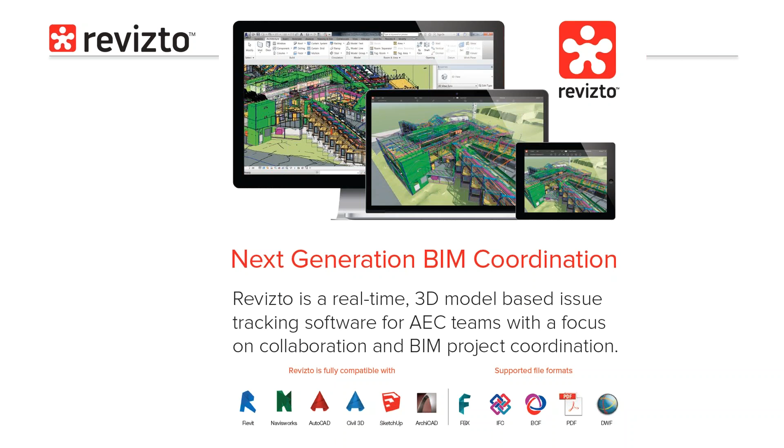So the problem today - the first conversation I have with a potential user of Revizto is just to talk a little bit about their current process, to identify what the challenges are and discuss the problems. What does the traditional coordination cycle look like for you? What I hear a lot is that this process can be very complicated, which is confusing because you have different consultants who use different technology, have different preferences, and want to store their data in different places, in different file formats. So this multidisciplinary communication can become confusing and cause delay and increase project costs.

So if you're involved in a project, how do you create an issue? How do you assign an issue to somebody? How do you notify them that you've updated the issue assigned to you? Do you wait until the next design review meeting? Do you send them an email with a screenshot, or print out a PDF and send that across and wait for them to respond? Do you have to upload the latest version of the federated Navisworks model and then wait for the other consultant to do what they need to do? How do you comment, communicate, and track all of this? It can be very difficult because people are doing different things, trying to achieve the same goal using different processes and different technology, and it can just become confusing.

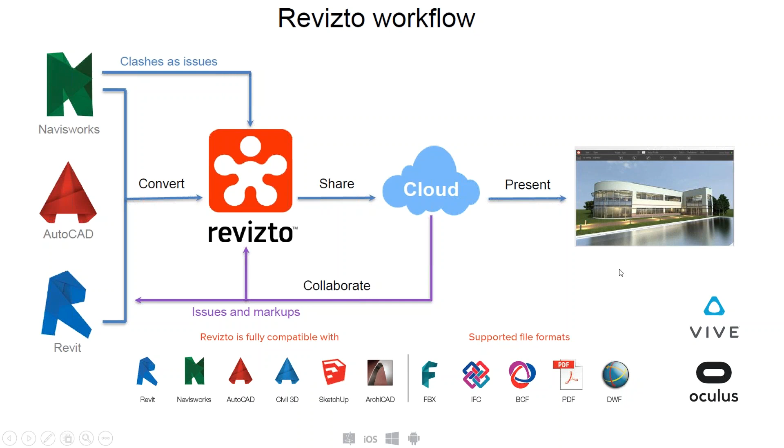...you can also view your model and clashes in virtual reality. So we directly support the Vive and Oculus Rift, and there are other virtual reality domes that we integrate with as well, like the Igloo, for example.

Let's get back to the software itself. So I'm just going to change my screen here and open up a Revit model. So once you've installed Revizto and the plugins, you will have the toolbar here, Revizto 4, available in Revit, for example.

So I'm not technical in Revit or Navisworks. So the first thing I want to do is export my project to Revizto. So under the tab here, we've got a number of options. One of those is export. So I select that. I'm then presented with a list of things that I can export.

And this will include rooms, sheets, levels. I can take the materials through if they've been applied, phases, grids. I can also take through all of the sheets as well and select what format I want those in, either as a vector or as an image. And this will also take through any linked files.

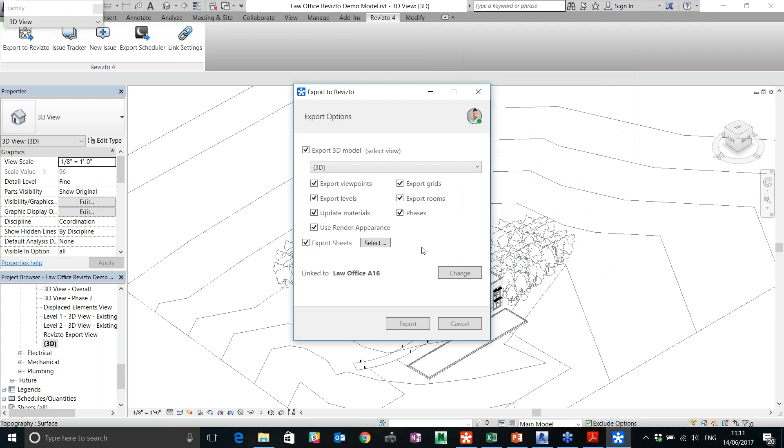So I hit export. I've done this one already, and in the interest of time, we will wait and watch. Once I've done that one-click export, I can then open up the project in Revizto, anywhere on any device that I have the software installed. So I could open up this model now on an iPad, for example, or in virtual reality, and so on.

The first thing I'm going to do, which I think is important to mention right away, is change my preferences and the navigation. So I can go in here and fine-tune a few things. For me, I'm going to use the gaming navigation mode, which is easy, if you like. You can also stick with Revit if that's what you're used to, or Navisworks, depending on what that user is familiar with. For me, I'm going to use game and go back to the 3D view.

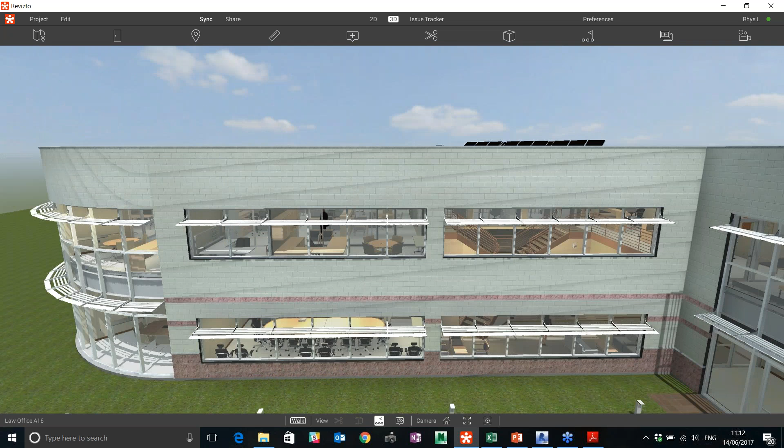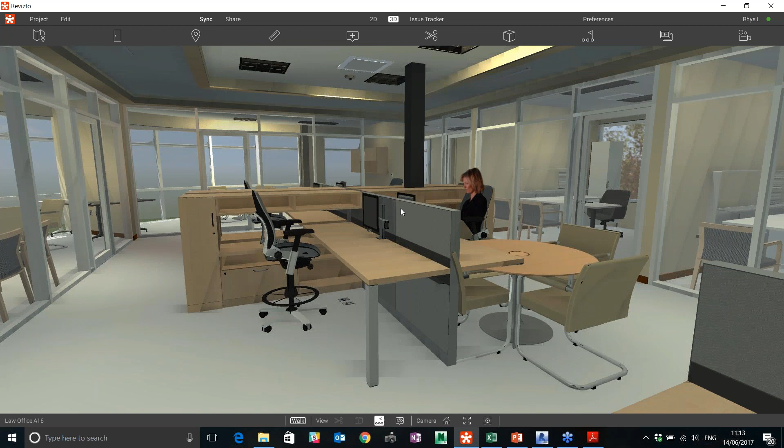So to navigate around this model now, literally with a few keys on my keyboard, I can start moving and exploring this particular project. So with my mouse and a few keys, I can dive straight into the building with ease. Coming back to that point of not being a technical user, a lot of what I hear from the people I speak to is typically on a project, if there's 50 people, a low percentage of that team are Revit, ArchiCAD or Navisworks experts. So it's reliant on one of those people being available to navigate them through the model. With Revizto, it engages all of the project team because the software is so intuitive and easy to use.

So I'm in fly mode at the moment. I can switch to walk mode at the bottom here, and then that locks me to that particular floor. I've got a number of tools here that I can start using.

So let's just take a measurement here. I can select our ruler key and go through and just start taking measurements very easily. Maybe I want to know the distance between the floor and the ceiling, for example. So there we go, it's 2.740 meters.

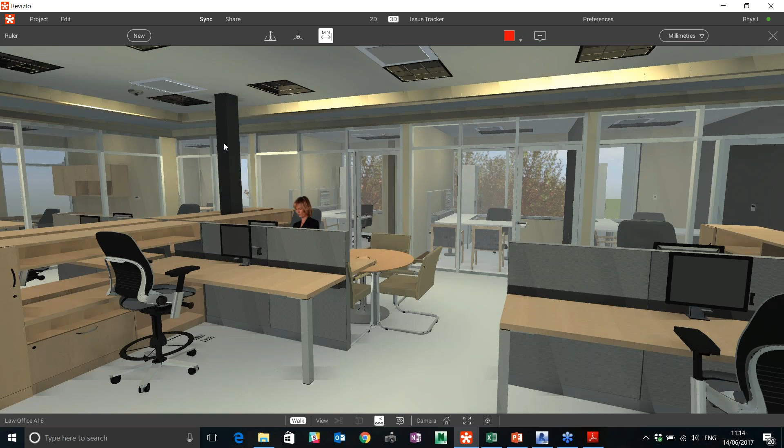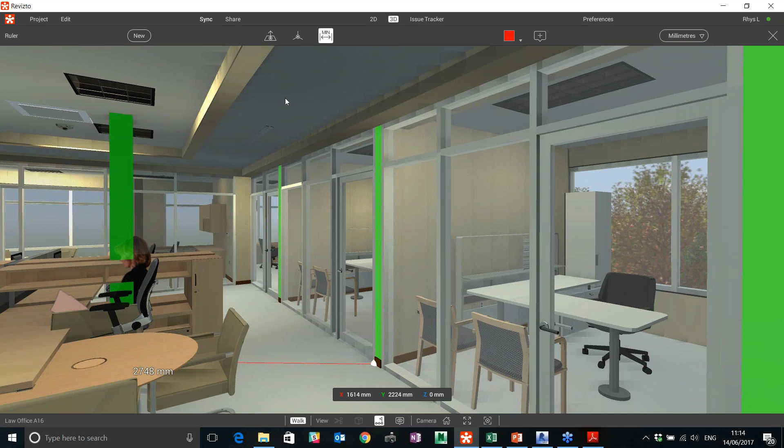I can take minimum distances. So if I select that column and that panel, for example, that will show me the minimum distance between those two, and that's displayed there. I can get a bit more specific if I really want to and move these ends to any surface and get that distance. So that's the 3D data come through as I'd expected.

Now the big difference about Revizto compared to some other visualization tools is this just isn't a visual model, this is information visualization. So if I double click on a property, all of that metadata has come through from the Revit model as well, so I can actually go in and view all of the data behind that particular property, which is obviously really, really useful and information that we need during the project.

And maybe the Revizto project is one of the end deliverables to your client then to use to operate that facility. So let's go back home.

Actually, just check that all the 2D information has come through as well because I exported all of those sheets. So all of my sheets have been listed here. I can see those listed one by one. And if I double click on a floor plan, for example, that then opens up the floor plan.

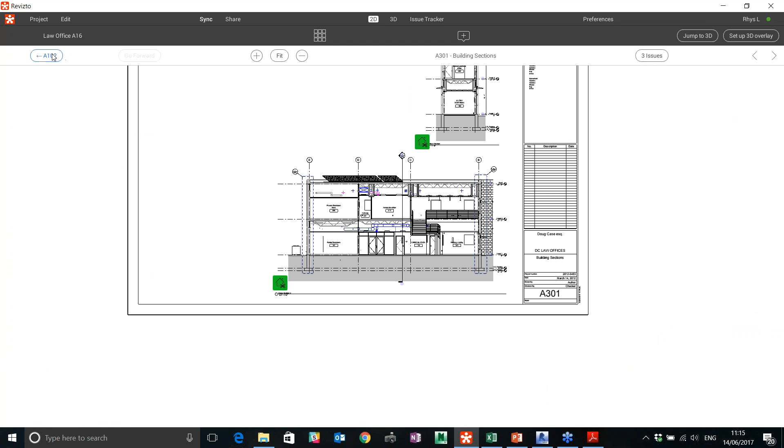So I can go in here and navigate around as I'd expect. It's also allowing me to jump to any linked sheets and go back. I can also jump to the 3D view from here just by double-clicking anywhere on that 2D sheet, and that will take me back to that exact spot in the 3D model.

And on this sheet itself, if I select the 7 issues at the top of the screen, that's now identifying and showing me where there are live issues on that sheet, color coding them based on their status. I'll come on to this shortly. I'll just hide them for now.

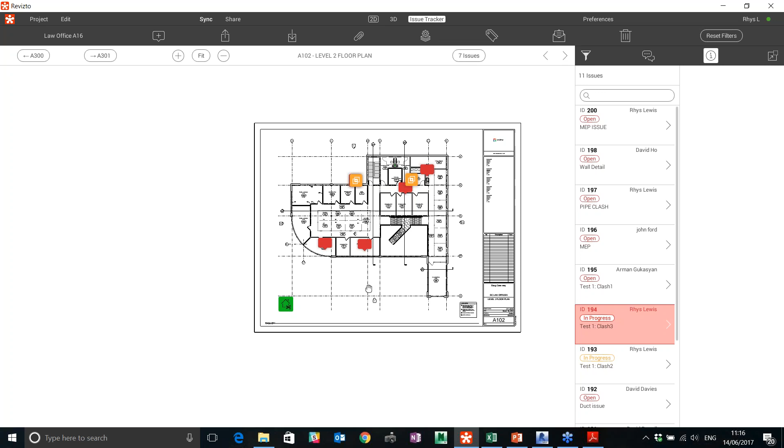Something else I can do, which is really powerful, is overlay the 2D sheet in the 3D model. If I select this green icon, watch the screen because it happens quickly, that's now overlaid the 2D sheet in the 3D model, which is so powerful for a range of reasons.

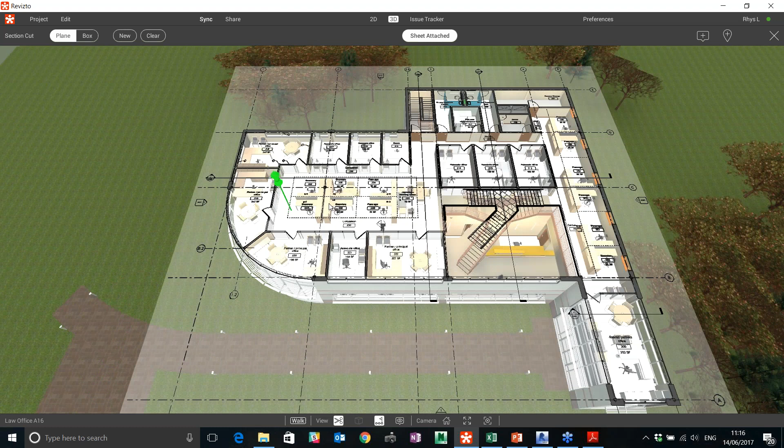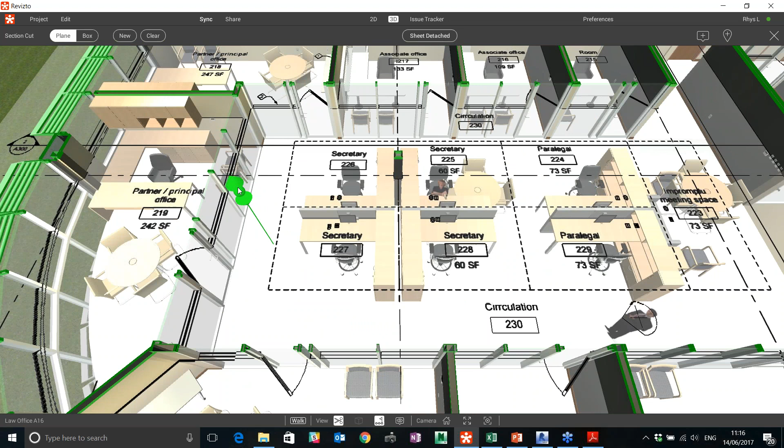If we just zoom in here and stick the sheet in place. The sheet knows where it lives because it's come in directly from Revit, and I can start dragging the 3D model through the 2D sheet. This allows me to perform an additional check between the 3D model and the 2D sheets, and also maybe explain to a non-technical person that the 3D geometry has derived from the 2D information, and lots of other useful features as well.

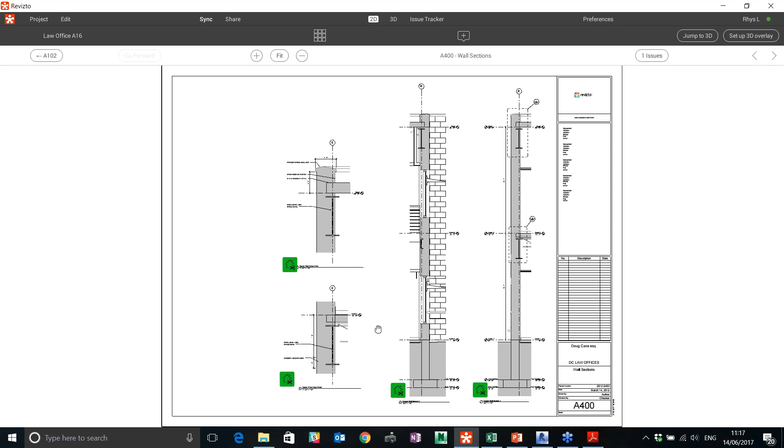I'll show you one example. If I select all my sheets and type in, let's look at one of the wall sections and open that up. These dynamic overlays have been set up automatically for me, so there's no additional work needed. If I select this green icon again, it does the same thing, but this time it's allowing me to check this particular wall detail. I can go through here and do the same thing, which is great.

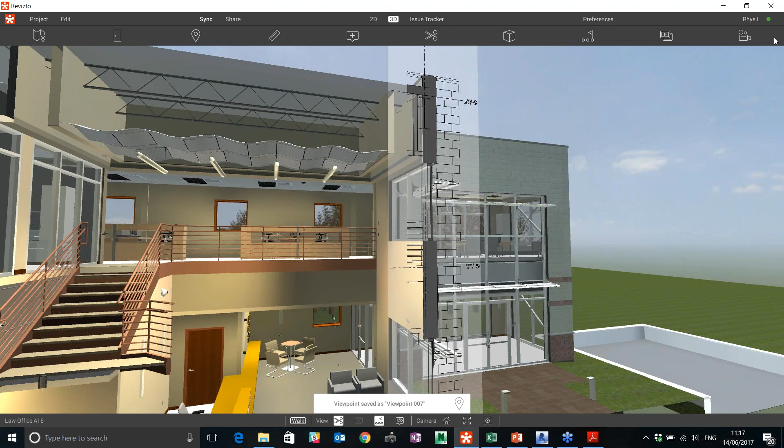So I may want to create a new issue from that, or I can create a viewpoint, and that will now be saved as my viewpoint, which I'll show you next. Let's go home, back to my home viewpoint.

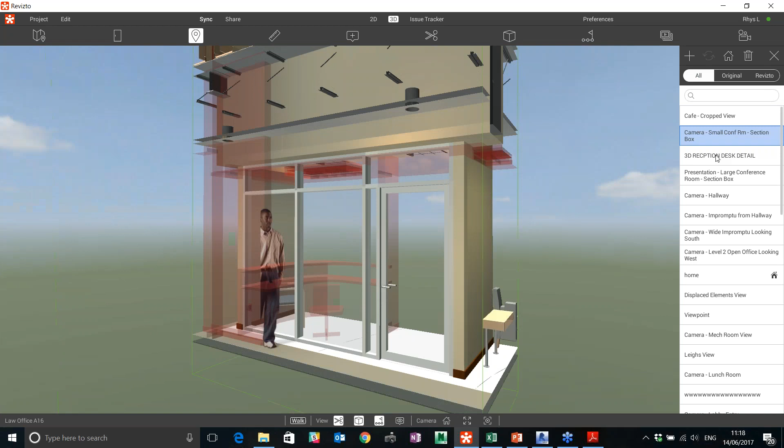I'm just going to run through some of the things that have come through from Revit. We mentioned viewpoints, so if I select viewpoint, I can see they're all listed here on the right-hand side. I can move through these one by one—a great way to navigate through this particular building.

On the right-hand side, there are the viewpoints I've created directly within Revizto. There's the viewpoint we just created, and if I go a little further up, there's a viewpoint where I've actually color-coded object categories in the scene, which I'll come back to shortly, and so on.

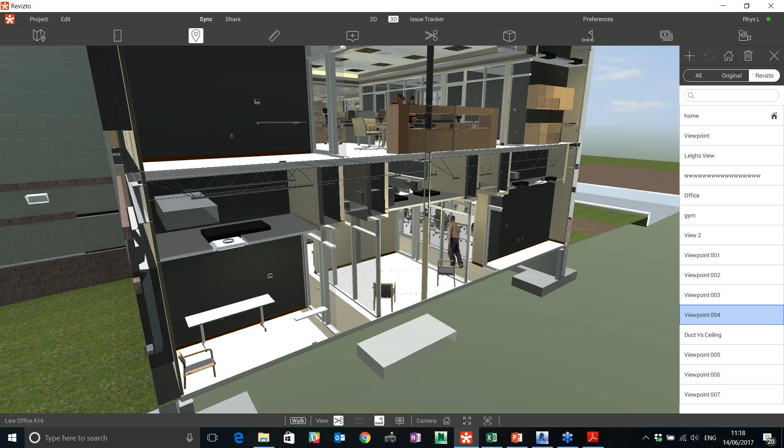Another really nice tool for navigating is that all of the room data has come through from Revit as well. If I select room here, all of the rooms are listed on the right-hand side, and I can browse through those one by one, just select the relevant room. That takes me to the center point of that room. If I know the room name, I can type it in, double click, and that takes me to the center of that room to look around.

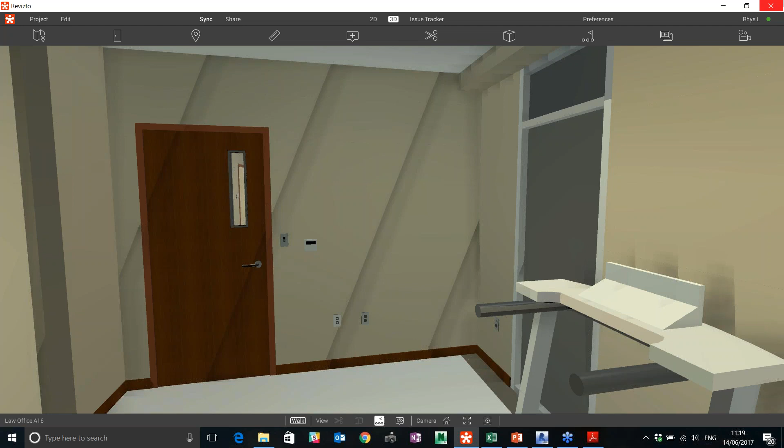Now, if you're using Navisworks just to navigate around the model, that's difficult to do anyway. What I hear a lot of users telling me is that they find themselves getting lost in a project if it hasn't been set up efficiently or correctly, especially in larger scale projects. With Revizto, it's actually quite difficult to get lost, but if you do, very quickly you can find out where you are. If I select our map icon, that's going to show me exactly where I am in the project. This is only a small example, but it gets the point across.

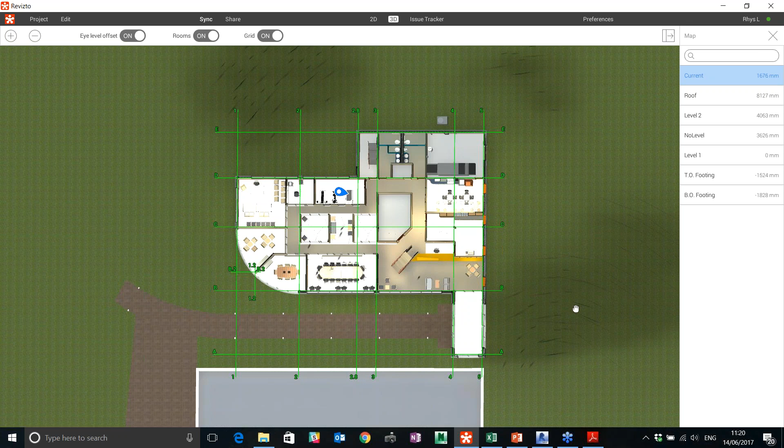That drop pin in the center is where I am. I can see the level I'm on, the rooms, data and grids have come through as well, so I can see all of that. Perhaps we're in a client presentation and want to move to floor 38 in a residential tower, for example. On the right-hand side, I double-click on the level I want to move to. Back into the plan view, then double-click on the drop pin, and I'm now back in the 3D model. Very, very simple to do.

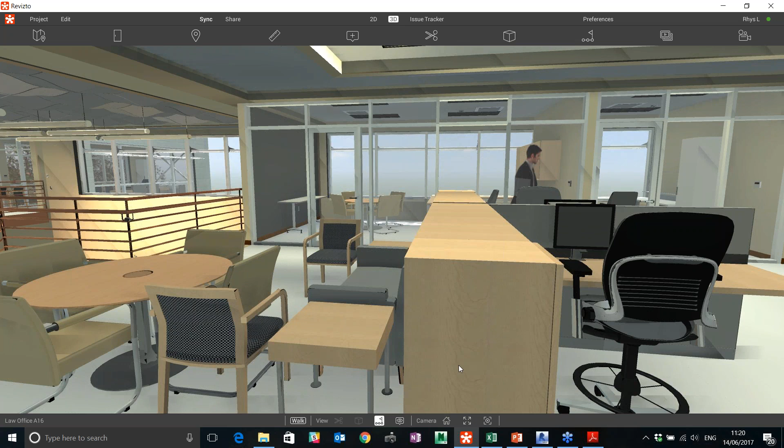So navigating around the Revizto project doesn't require much technical experience or training at all. You don't have to be a Revit or a Navis or a Civil 3D expert to go in and explore this model.

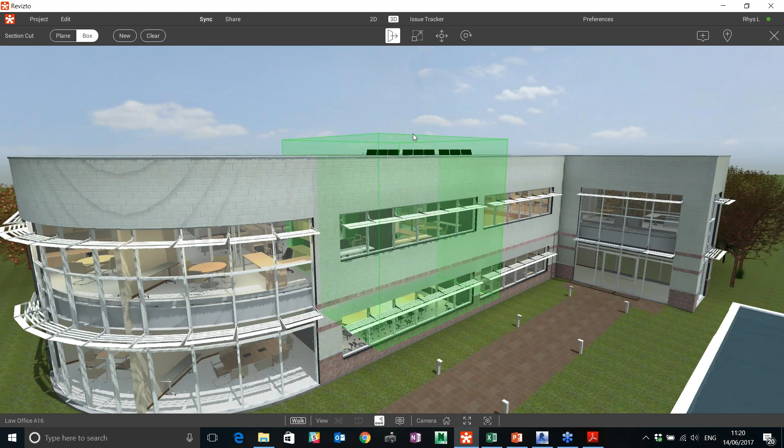One or two final things I'd like to show you here is I can start cutting sections through this building. I can apply that maybe to this wall and very quickly go in here and start chopping up that model. All of this I can do on a tablet, so that's a plane. I can create a section box and do a couple of things here as well—make this bigger, smaller, just move the position of that.

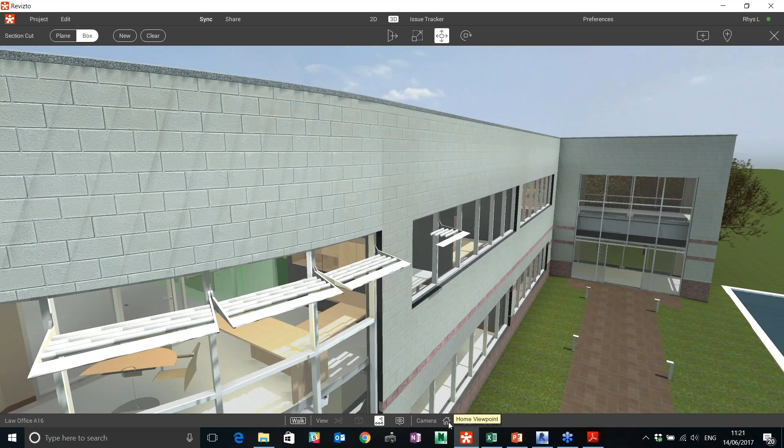So very, very simple to do, which is important if you want to engage the whole of your project team.

We can go in and also color code and isolate link files, objects, and phases. So within here, I've got everything showing. If I hide everything in the scene for now, maybe I only want to look at the mechanical equipment.

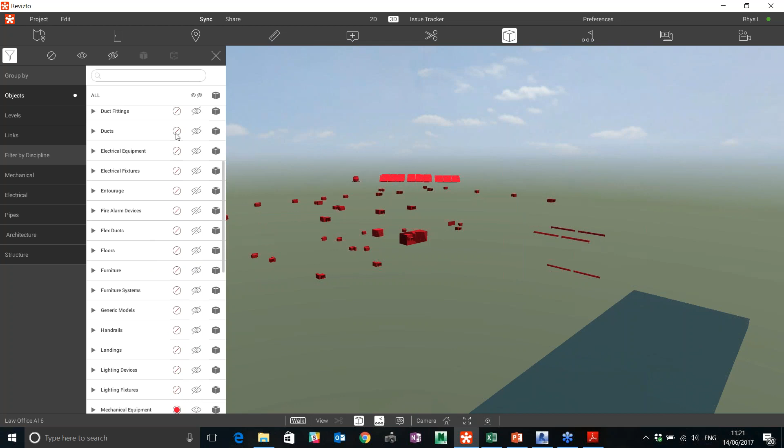So we'll bring that in, and I can actually color code this. I can go in here and choose the color that I want that particular object or category family to be displayed as. I can actually go right into individual objects as well if I want to. Maybe we want to look at some of the ducts in here as well, so let's make those blue and make those visible. And some of the duct fittings, we'll do the same thing where we color code those. And I can take the same hex color as well if that's what I want to.

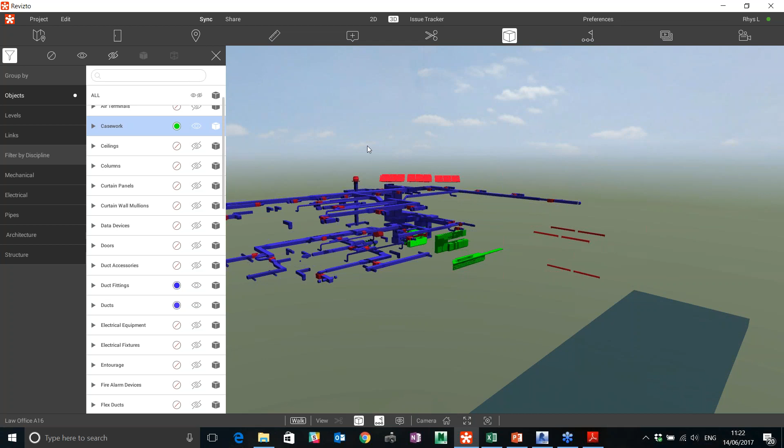And we'll put one more in there. Maybe we want to look at some of the casework, and we'll make that a separate color, and bring that into the view as well. So a great way to visualize your model and go in and perform additional checks.

So we've been asked for this for quite a while by some of our key clients. So I think the important thing to mention is our development roadmap is heavily driven by our customer demand. So the product is doing what our customers are asking.

Maybe this is something I want to share with somebody, so I can create a new issue, or just save that as a new viewpoint. Click on the plus icon, and that's now been saved, and I can call this whatever I want, and that's now saved. So whenever anybody else comes into the project, they'll see that in the viewpoints.

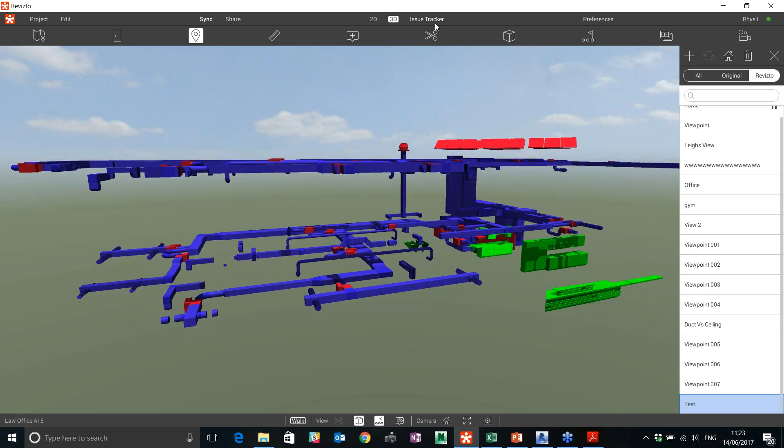So what I've done so far is exported my Revit model into Revizto.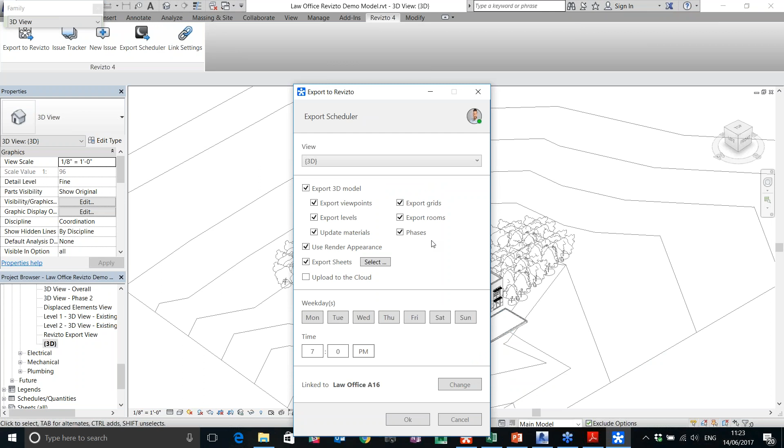What we can do as well is that process gets done automatically. So if I go back to Revit, I have an export scheduler where I set up the schedule to run maybe at 7 o'clock every evening, so the latest version of that model is uploaded to Revizto. And I can select what it is I want to export back to Revizto. And under project, I can see it keeps a copy of all of the revisions as well.

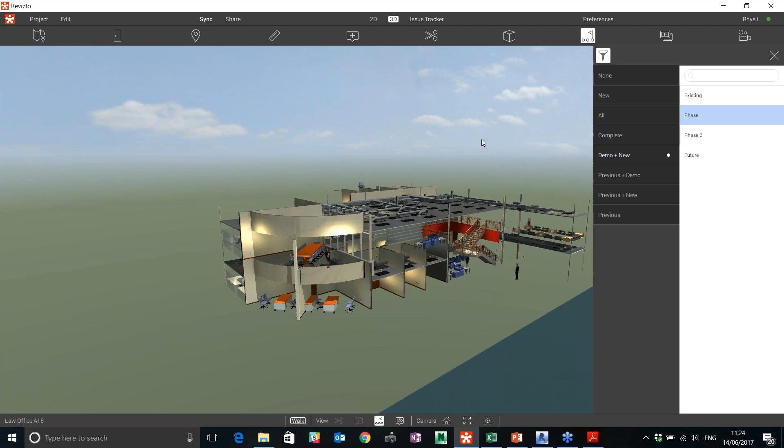Because this model has come in directly from Revit, I can go in and look at phases as well. If you set these up in Revit, then I can go through these one by one and use that filter to look at different phases that have been created, and go in here and mark that up, which I'll show you next. So a really, really powerful navigation tool, but the real powerful part of Revizto, in my opinion, is the issue tracker, which we're going to look at next.

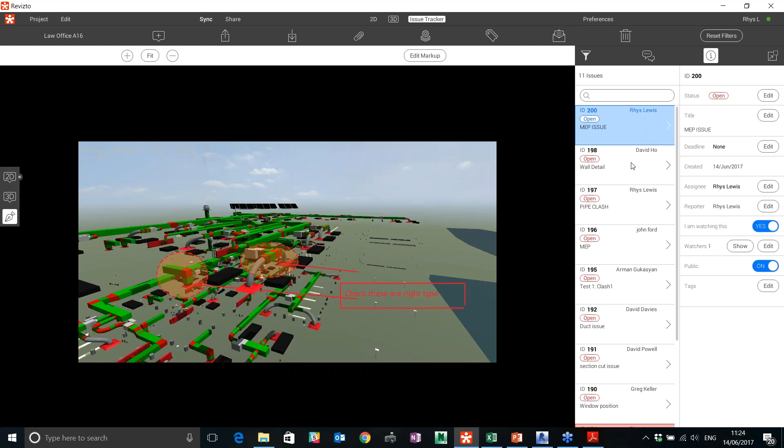So let's talk about BIM Collaboration. With Revizto, you have the ability to manage and track all of your design and coordination issues in one environment. So if I select the issue tracker, you'll notice down the right-hand side here, there are issues that have been created previously. So we'll come back to these in a second. And these issues have been created in a number of different places.

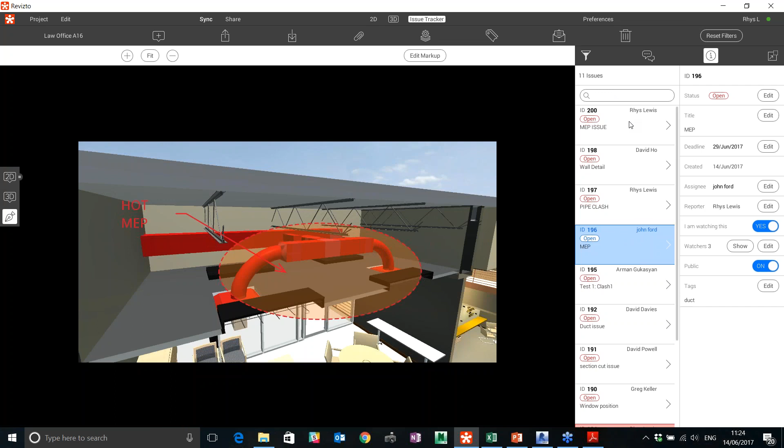So if you've got Revizto installed on the plugins, it doesn't matter where you create an issue, whether that's in Revit, in Navisworks, in Civil 3D, or in Revizto itself. They're stored in what I like to refer to as your single source of truth.

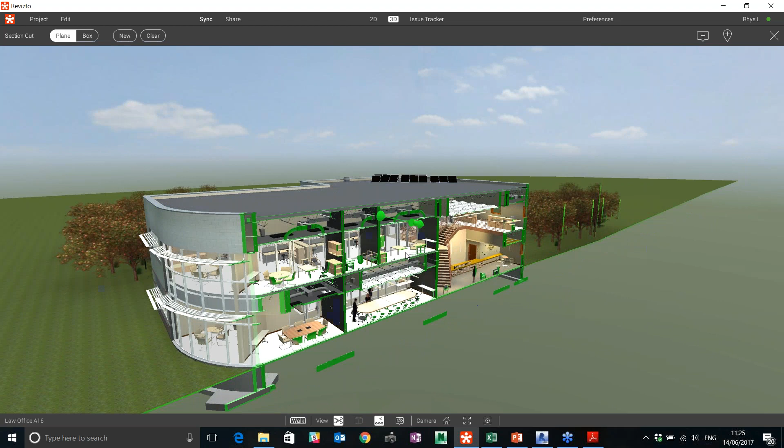So let's go back to our home view and create an issue. We'll do that first of all in 3D in Revizto. Let's maybe take a section through the building here and go in and explore. We can do a couple of things here. Let's take, first of all, a measurement between the two walls to see if they comply with whatever regulations we have for this building.

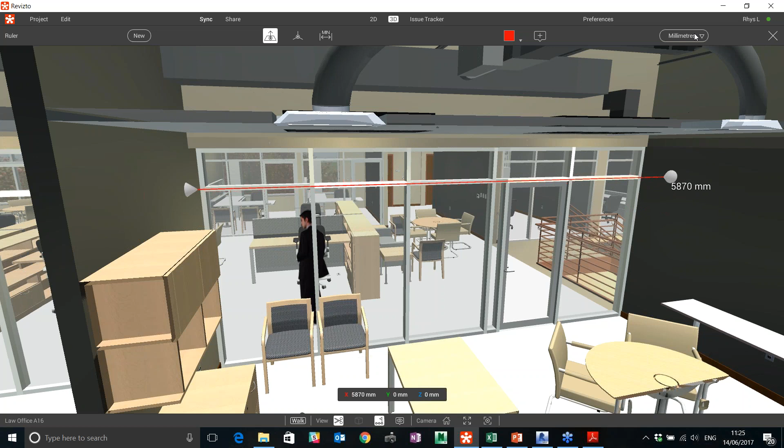So that's not quite wide enough. So I want to make a note of that and create an issue. And I can change the measurement there. So I've clicked on the plus button there, which is to create a new issue.

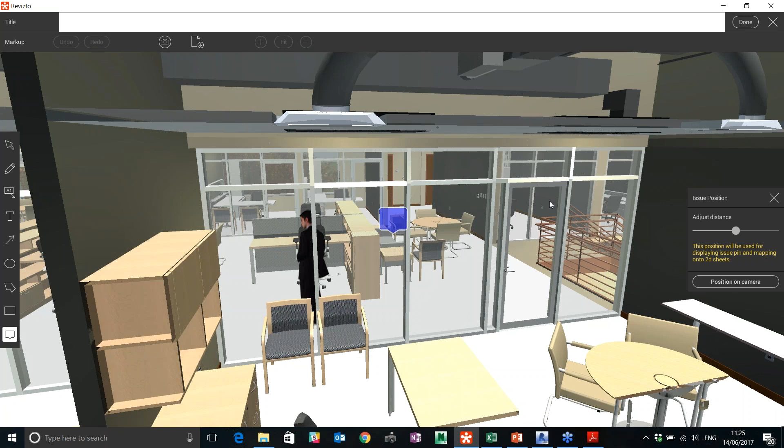So we talked about this earlier on, and how do you do this currently. I'm not going to create a viewpoint if I'm in Navisworks. I'm not going to punch out a PDF if I'm in Revit and then redline that up and send that to somebody in an email and wait for them to respond. What I'm going to do now is actually mark up the model. So on the left-hand side here, I have my markup tool. Let's start annotating the model.

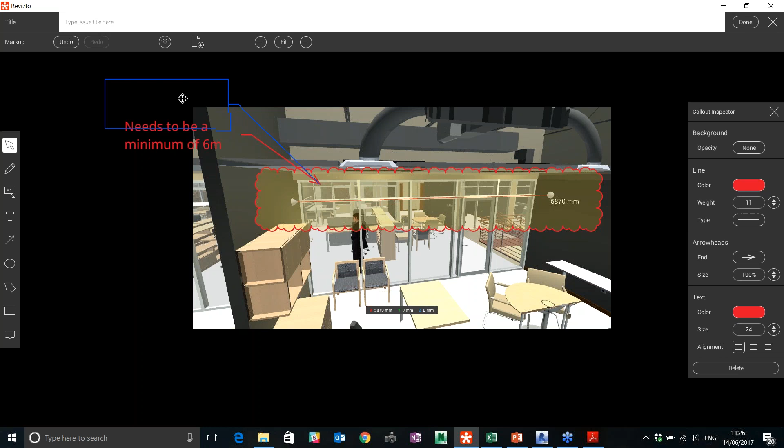So I can change the colors, the type, the size of the text and the arrows and all of that good stuff. But I'll leave you to do that yourselves when you install the trial version of Revizto. We'll just add some text there to say it needs to be a minimum of 6 meters, for example. We'll put that there, and we can change the size very, very easily. And that is now my markup, if you like.

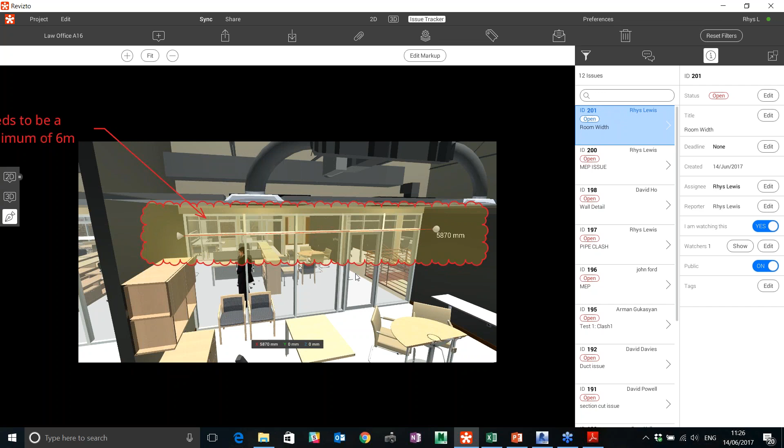I'm going to give it a name at the top here, so we'll call it room width, and I'm finished there, so I'm going to click done. Now what that's done is store that issue in the issue tracker, so it's given it its own ID, 201. This issue is now intelligent, so it knows where it lives in the project.

So if I click on 3D, that takes me right back to the 3D view of the model, and now I can see there are other issues displayed because I have the issues visibility switched on. If I click on 2D, that will show me all of the 2D sheets that issue touches. This particular issue on this sheet is the blue one, and there are others on there as well.

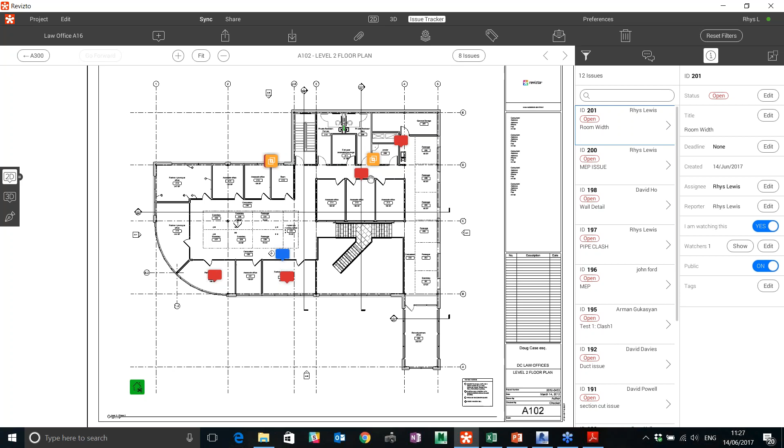So I could double click on another issue and that will take me back to that issue in 3D. But let's just focus on the one we've just created because I need to action this. So I've created the issue, and there's a few things I can do here now.

So the first thing I want to do is actually action it. I want to assign it to the architect on this project, who is maybe Arman. So Arman will now get an email, and if he has Revizto open, it'll ping to notify him he's been assigned an issue.

I want to assign a deadline to this to ensure it gets done by our next design review meeting. So I'll allow 2 weeks for that change to be made, for example. A bit lenient, but that's fine.

I can add tags to this issue, so we'll add wall if it's there, and it is. So we'll just click on that, add, and that's been done.

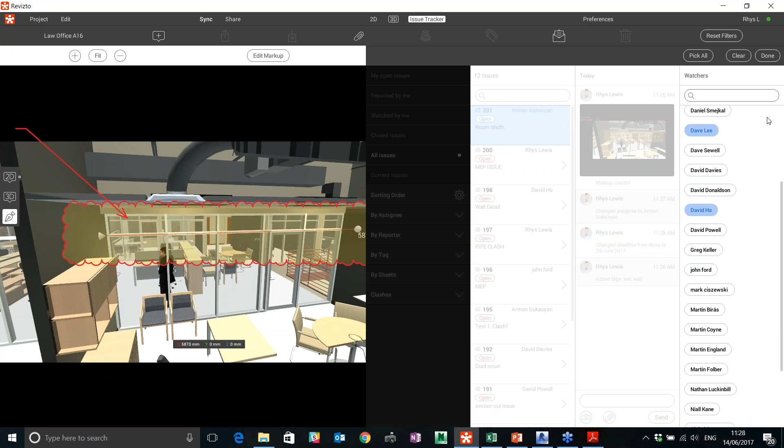And maybe this is a critical issue on this project, so I want to notify 2 of the project managers when any change has been made or additional text is added. So if I type in Dave there and maybe another David, click done, they'll both get notified when any change is made. Each issue gets its own live messaging feed.

So in here, I can do a number of things, so I can add text. Please amend ASAP, click send. And all of this now is happening in real time, so everyone associated with this issue will get notified when any change is made.

So if I edit the markup, that'll get stored here as well. If I'm on my iPad and out on site because I'm maybe reviewing the status of the build, or I'm the contractor, I can actually take a picture with my iPad and assign that in the issue as well.

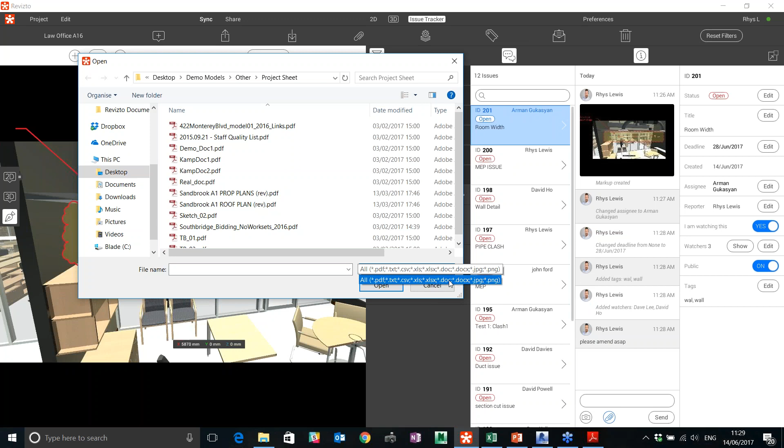I can attach additional documentation, a range of different file types. So maybe I want to attach this document and say refer to this guideline, for example. Click send, and now everyone in that issue can see all of that. They can double click on that document and they'll be able to open up that particular document, which is just an example, of course.

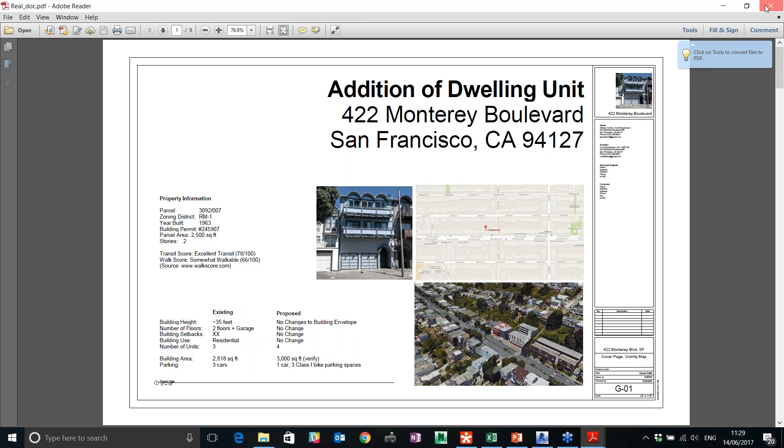So the list here on the left-hand side is my filter, so I can filter the issues in lots of different ways. I can filter by assignee, so maybe I want to see all of the issues that are assigned to the architect Arman on this project. Select that, and that list of however many is reduced to 2.

So in our design review meeting, we can go through these issues and actually action them there and then, as opposed to waiting 2 weeks for the person taking the minute notes to respond. So I can actually ask Arman in the meeting, Arman, where are you with this, please? And then update the status to say it's in progress, and we actually need to set the deadline to the end of the week. Click done and make a note to say as discussed.

So this almost becomes your email chain, if you like. You've got traceability and accountability in one place, coming back to the term I mentioned earlier, my single source of truth. At the top, I can filter by ID number, by tag, by person, and so on.

I can get into lots more detail here, but I won't go through absolutely everything. I can filter by clashes, sheets, and so on. The issues can be created in a number of different places.

Those of you familiar with Navisworks will notice this came in directly from there. I ran a clash report in Navisworks earlier this morning and imported a few examples. So this clash has come in directly from Navisworks. I can go through here, assign this to somebody, and put a deadline against it as well.

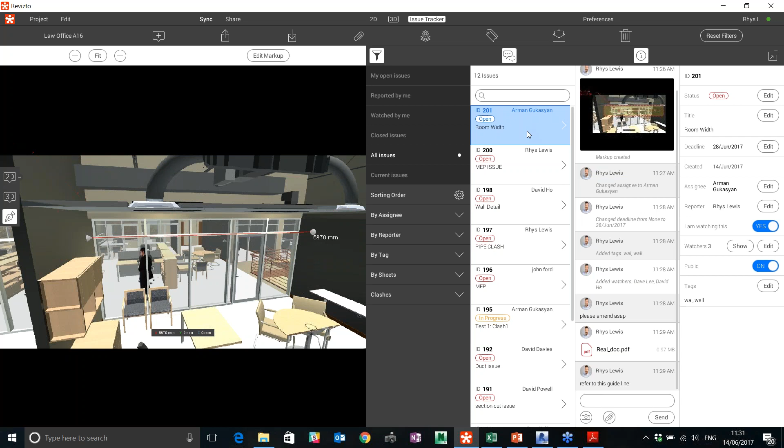If we just look at the top issue that I created, this issue is dynamically linked back to any of the authoring tools you saw on my PowerPoint previously. So if I double click on an issue in Revizto, it knows where that issue is in Revit, Navisworks, or AutoCAD.

I'll double click on that and show you what has happened by bringing Revit back across onto this screen. That's now taken me directly to that point in the Revit model where that room issue is.

So that's done a number of things. Think to yourself, how many times have you received a screenshot from somebody that doesn't really mean a lot, relating to maybe a duct in one of the ceiling voids on level 38? That just takes a lot of time to find out where the issue is, and because of that, the user may end up changing the wrong duct. That causes delays and increases the amount of time spent on the project overall.

What Revizto has done with that single double click is take me to the exact part of the model I need to be in. It just streamlines the communication process and makes things clearer for the project team to understand.

You may not even be involved in the Revit or Navisworks model, but you can still come into the issue tracker and see exactly what's going on, filter issues by deadline perhaps, or look at my open issues as my to-do list for the day, and so on.

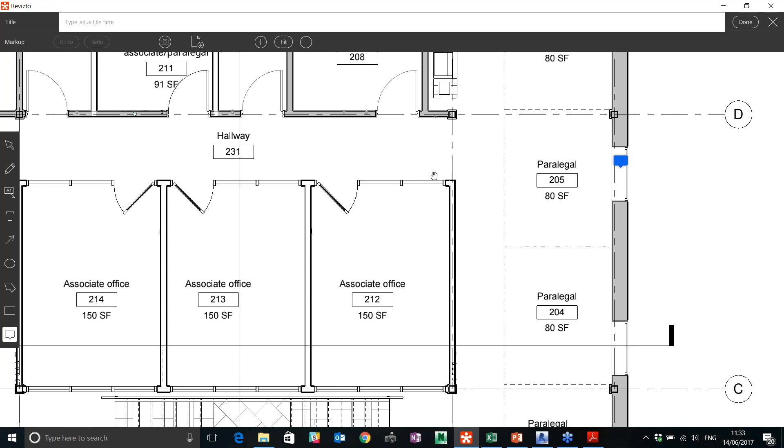Let's go back to 2D and create an issue in 2D. We'll take a look at this sheet, for example, maybe there's an issue with one of these windows. Same process - I click on the plus icon, position that, and then mark this up, add some text.

We'll say wrong position, click done, give it a name at the top. Just call it window for now, click done. And again, that has now been tracked and logged in the issue tracker.

Through the same process, this needs to be solved by next week. Assign that again to maybe Andrew and ask him to resolve by next week, please. Click send, and all of this is happening in real time. If these people were online, they'd be able to see this and comment back here in the issue tracker, and I'd be able to see all of that instantly.

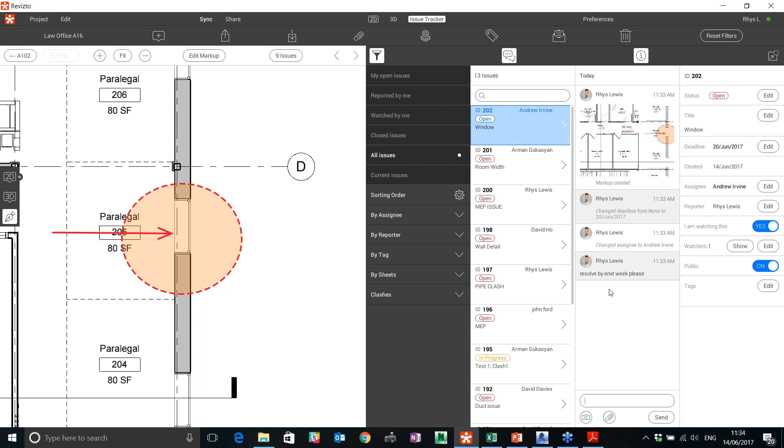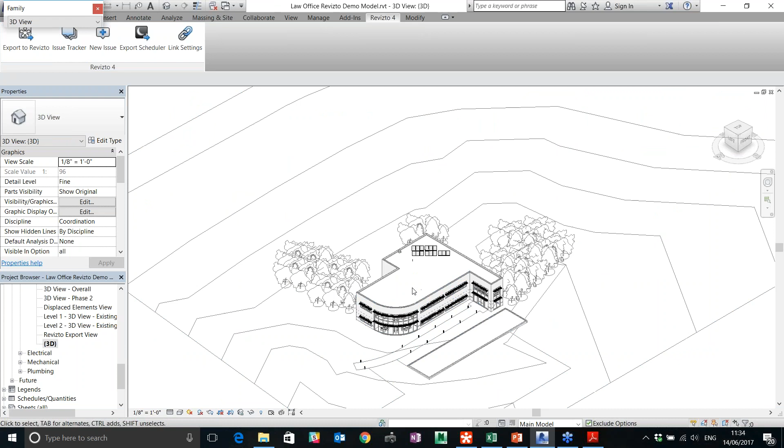So we've looked at creating issues in 3D and 2D and talked about how they're dynamically linked back to the authoring tool. You can actually create an issue in the authoring tool as well. If I go back to my 3D view within Revit, you can see at the top here I've got new issue. Let me scroll in here - maybe we want to move the position of these solar panels.

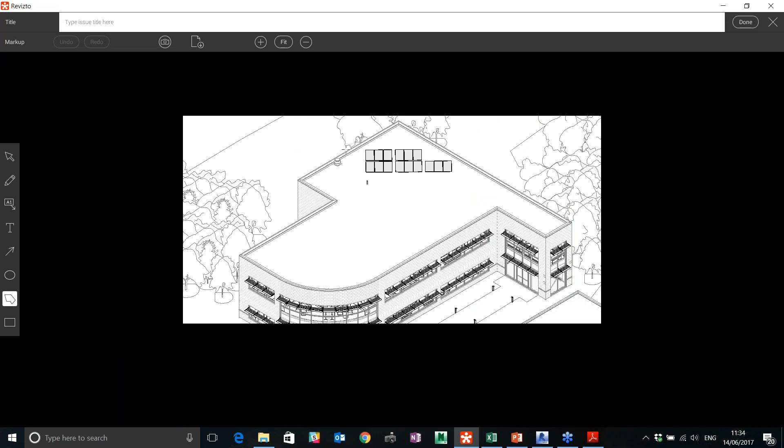To reflect the position of the sun, if I click on new issue, same process - that's taking an image from the Revit model, and I can go through here and mark this up, add some text. We'll call this one - let's just put in there, update position.

Click done. Happy with that, and we'll say solar. At the top, click done.

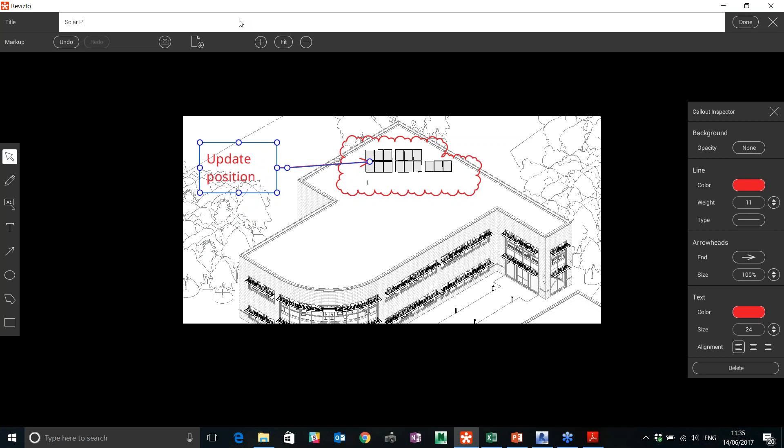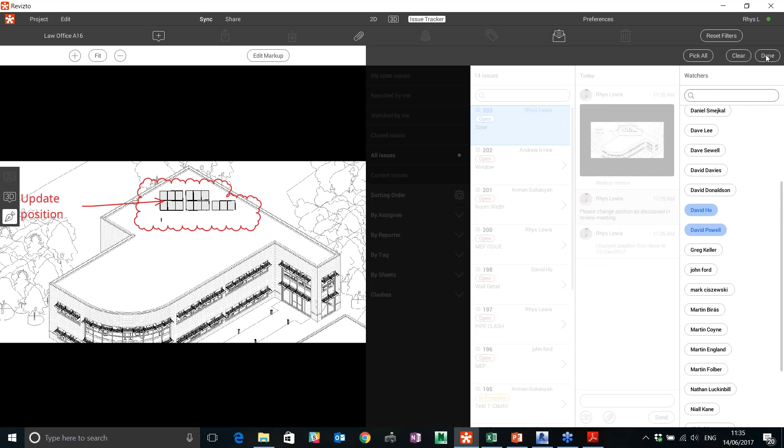These need to be changed because of a discussion we had with one of the consultants. Please change position as discussed in review meeting. Done, and update that with the deadline. Maybe this is a critical issue on this project, so we want to add some watchers to that, so the two Davids here will also get notified when that is updated, changed, and so on.

One thing I haven't shown you yet, if I go back to 3D, is we can actually set up a camera share session, and you can record a video directly within Revizto. This camera share session is what some of our customers are now using to have their design review meeting.

So as opposed to getting everyone in the room with all of their marked up drawings and somebody driving Navisworks on the screen, what you can do with Revizto is anyone you invite to the project by clicking share, you can invite them in here and give them relevant permissions. So this is a demo project that some of you may be involved in after today's session, so you'll be given these access rights.

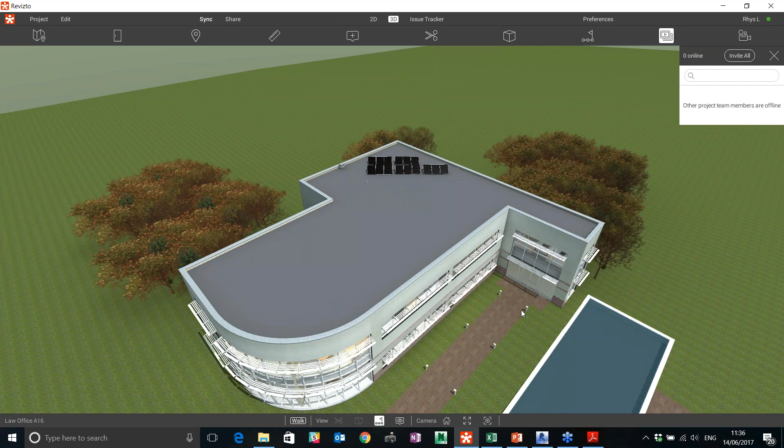I can set up the camera session. Anyone online I'll be able to invite into the model, and I know I'm presenting now via GoToWebinar, so there might be a very slight lag. With Revizto, you'll be able to see in real time exactly where I am in the model. The other interesting thing I can do here is give somebody control to navigate who may be in an office in Singapore, for example, or anyone else who's online.

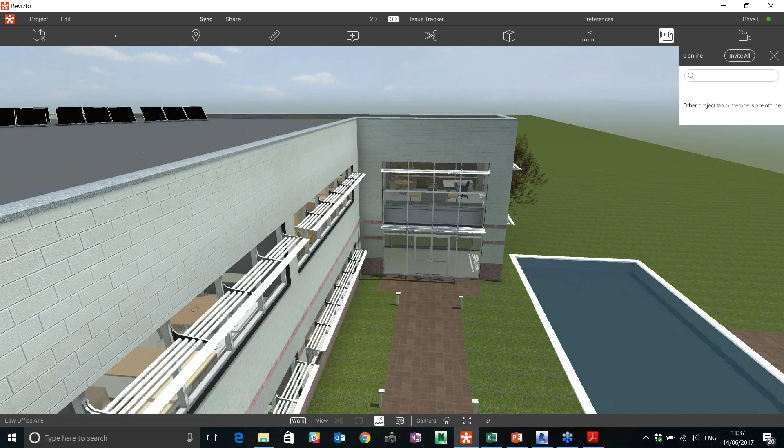And in that meeting, I can actually go through the issues one by one and assign them in the review meeting in the model, so you don't have this delay of a couple of days or a week after the design review meeting where an Excel spreadsheet gets updated because 50 people have been sent an email with a to-do list or an NWD with all of the clashes. It all gets managed and tracked in this single environment.

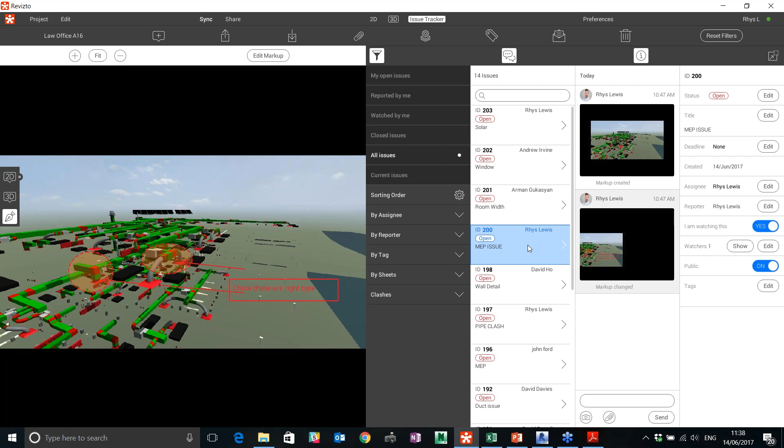Coming back to one of my earlier points, it's so intuitive, easy to use. So this is a tool that's used for coordination and collaboration, but I see more of our customers actually using this for those non-technical Revit and Navisworks people to have that model out with them on their iPad, to discuss the model with clients. If they're a contractor, they want to take information when they're out on site and record that as well. So you've got this seamless workflow where everybody can be involved in the project, regardless of their skill set or technical experience. Revizto makes that a much, much easier and simpler process.

Now, what's also really important to mention is I've got all of these issues here that I can now report on. So I can import and export via BCF as well, or I can generate a report directly from Revizto by clicking Export, and these can be exported out as a BCF or Excel.

The smart way to do this, let's go to our workspace. I can get a login when I purchase a collaborator license. So if I click on the reporting tool at the top here, this now opens up my workspace where I have access to manage my license, all of my projects, and create very detailed reports.

So this particular project, let's create a new report for that. What I can do here is give it a name, and we'll call this webinar test. I can select the time period, so we want to look maybe at project start date to current date, so that's everything.

And I can get into as much detail as I want, so I can report on issues that have been tagged a certain name, or they may have been tagged by trade, or BCF, or whatever, it's up to you, or by assignee, so maybe I want to look at all the issues that have been assigned to a specific person or to a specific consultant. There are lots of options to summarize there. What I want to do is just click Save, and this will generate this chart for me.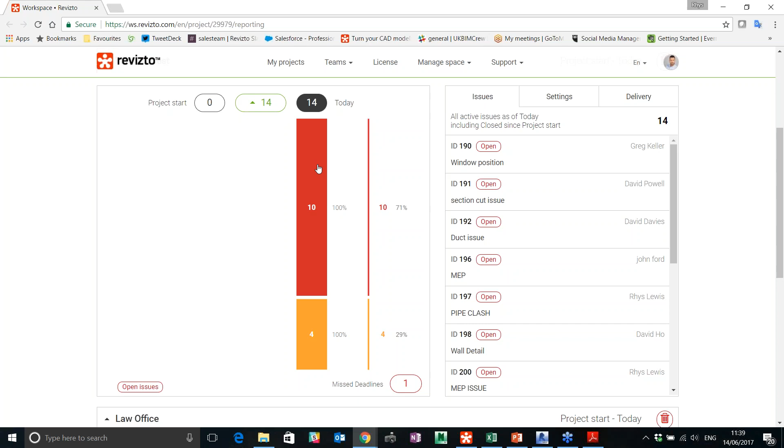So this is a relatively new project, and what I can see in this chart on the left-hand side is the total amount of issues, and they're listed down the right-hand side here with their ID, assignee, and the name. It also quite nicely color codes them for me, so I can see these here. There are, out of the 14, 10 issues open, 4 in progress, and the important one for that project coordinator or BIM coordinator is one of these issues has missed its deadline.

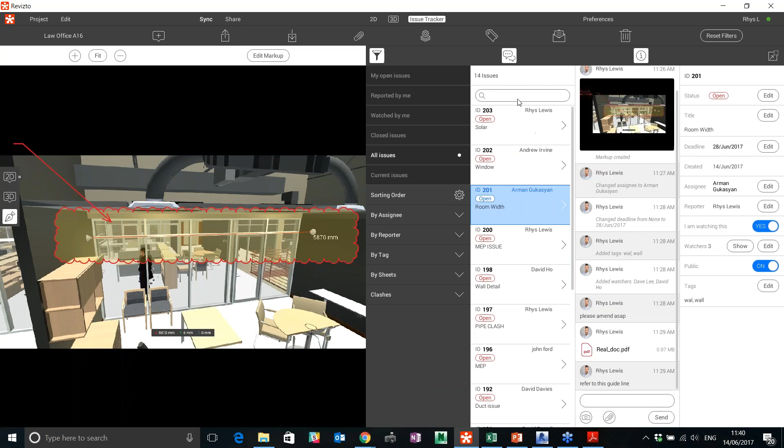So let's select that. I can see that that's 194, that's assigned to me coincidentally. So there's two things I can do from here. First of all, let's just go and take a look at that issue in Revizto. So it was 194, and yeah, I just need a bit more time on that one for now, so I'll extend the deadline.

I can see somebody's just come online, so I could invite them in to have that screen share. I've just gone back because I'm actually involved with the project, so I can select that ID, go into the project, and update that accordingly.

Let's generate a report now of these 14 issues. So there's a few things I can do here.

I can either set up a regular delivery for a generic report for the whole project team that gets sent out every Friday at 2 p.m., for example, and click save, and that will then get done. I can set up a schedule to send to only the architects all of their issues that have missed their deadline, or I can send a report immediately.

I choose what format I want that report in, click send now, and I'll get an email if I put in my email address, with the links to download the 3 different versions of those reports.

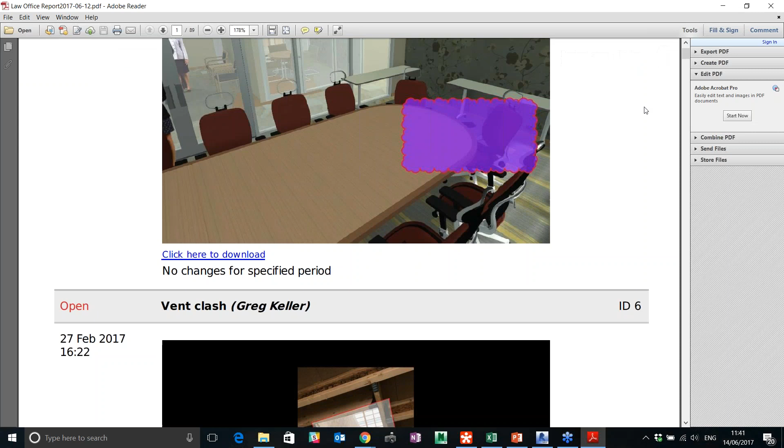So I have an example open already in PDF. Here's an older report related to this project that has listed the report name, and if I scroll through this report, it has listed out the issues one by one with all of the relevant information.

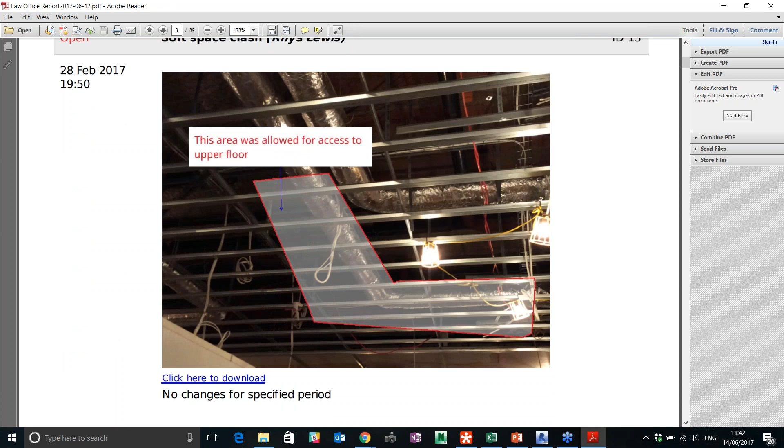I had an interesting conversation with a consultant in London a few weeks back who generated a report very similar to this that had taken them half a day to generate. That was because he had to collate information that was in lots of different places, in viewpoints and NWDs, screenshots, emails sent back and forth, and check the Excel spreadsheet to update the status. He'd spent half a day.

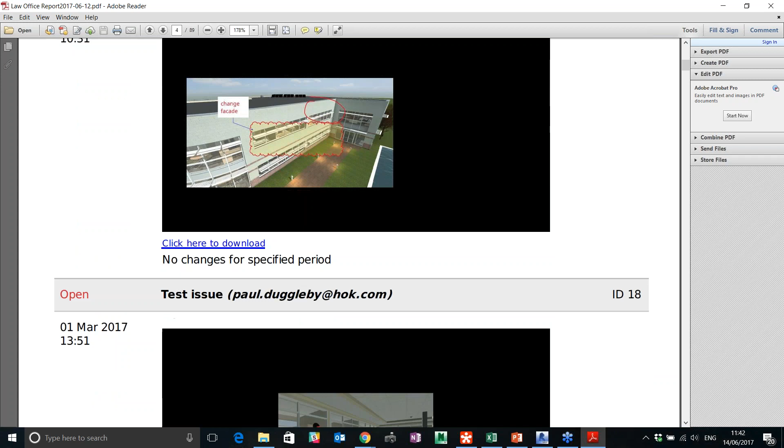With Revizto, I've clicked on that button to print out the report, and I've had this 90-page document sent to me immediately. So the amount of time and confusion that's saved by using Revizto really does pay for itself very, very quickly. And I can export out an Excel spreadsheet or a chart and so forth.

So if I just come back into Revizto and go back to our view there, come home. Everything you've seen here, if I go back to my workflow chart, we like to think of ourselves as being open BIM, or interoperability, which is an important piece of what the AEC space wants to do. This chart here just identifies that we're not specific to one vendor or one product.

We like to try and allow our users to be able to import as much data and in different formats as possible, and then share that in a range of different ways via different devices, because our clients are using different technology and have different preferences. So I'd like to think that Revizto ticks a lot of those boxes, bringing all of that information together, creating a single source of truth in a user-friendly environment that even a non-technical person can use. So there is really no excuse not to collaborate using Revizto.

So I'm going to stop there. I think I've shown you as much as I'd like to. I've probably not covered absolutely everything, but hopefully given you a good overview of what's available in Revizto today.

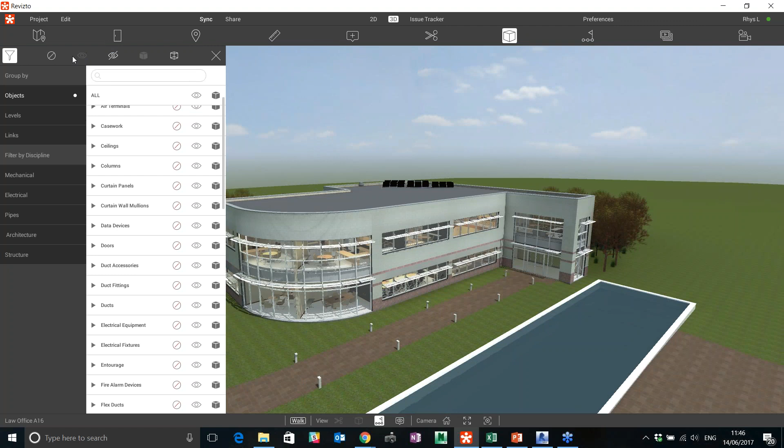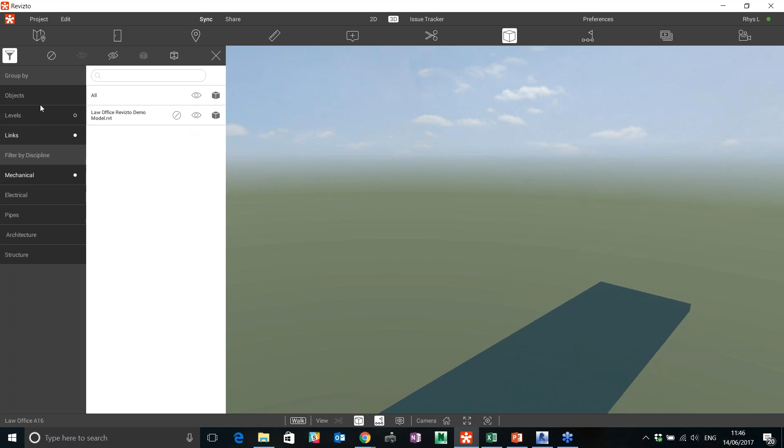How to hide a whole model? Well, if I go back in here to the objects, I've got some tools across the top where I can isolate levels or color code levels, so I can switch them all off, and maybe just look at level 1 and color code that red, for example, or hide it, and that'll hide the whole model. I can go into linked files, so if I had any linked Revit files, maybe 10 of them, I could isolate those and color code them and get into the details of specific object categories. I have a viewpoint here which shows some of that, where I have isolated parts of the model and then color coded certain elements.

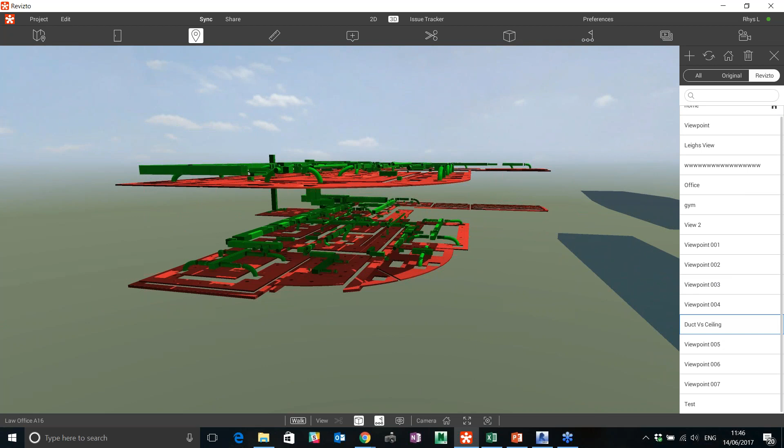Are the hide tools available in version 4? Yes, they are.

Still looking at some of these questions, so bear with me as I try and scroll through them. How well does this model work with huge projects? So we haven't found a limit with the size of model that we can handle. That really does come down to your processing power and graphics card that you have available. Some of our customers are working on huge models and running that absolutely fine.

Good question here about licensing. Do all project stakeholders need to have a license to use it for a project? With Revizto, you can share the project with your project team for those to collaborate and create issues, assign issues and update issues. If you wanted to give somebody access on a tablet, they'd need to download Revizto and log in. What you can do is export an exe, which is just a free viewer that you can share with somebody for them to open up and explore on their machine.

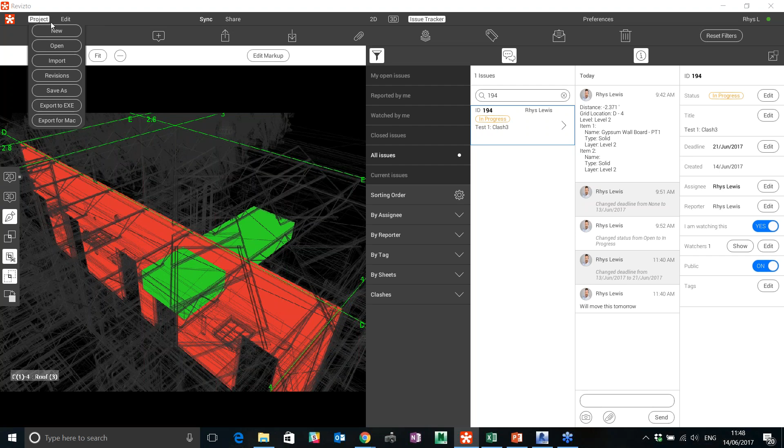I'll take one or two more questions. Revisions is another one, so you may have missed that earlier on. Revizto keeps a copy of all of the revisions, so as you're updating your version of the model, it keeps all of the revisions and you can jump back to any one of those at any time.

I'll take one more question. Somebody's mentioned about cloud and data on your own private server. So when you convert your Revit model, for example, to Revizto, that processing gets done on your local machine. Only when you click share, you've then got the option to share the project via a shared location of your choice, one of your own servers, or via the cloud. So that choice is up to you. And the cloud is actually AWS, so Amazon is what we use. It's all ISO accredited and so on and so forth.